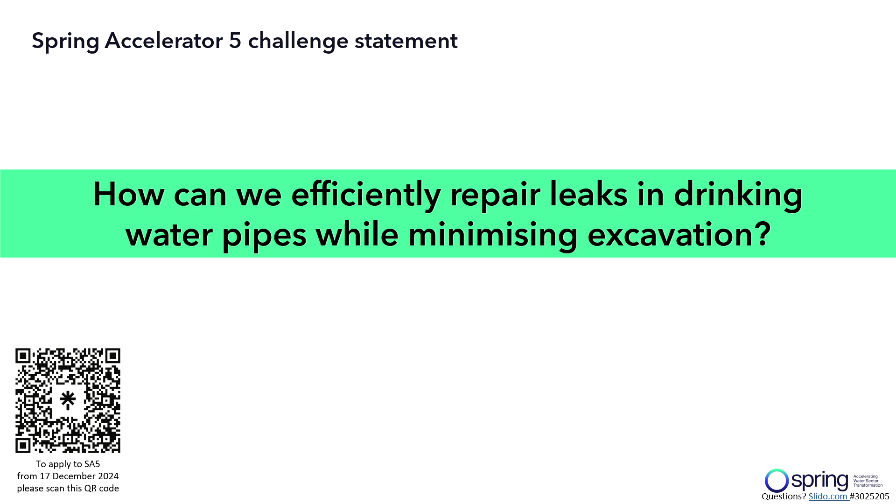So how has this challenge been selected? All the water companies in the UK and Ireland submitted their business plans, their innovation priorities. We went through all of these, we collated them, we assessed them to see what the top innovation priorities were. Water companies then voted. We did a lot of things. But I want to particularly thank Jez, who did a lot of hard work in this space.

He engaged with the Leakage manager group to be able to narrow down some of those different challenge areas, find what their problems were. With this short list of problems, we would then much more easily be able to go to the water companies and say, which of these do you think is the greatest challenge? Because sometimes when we start off this challenge process, just going to a water company and saying, what are your issues? It is quite a difficult thing for both us to ask and them to answer.

So we took all of those key challenges together, and we discussed it at length at the Spring Accelerator 5 Ambition Surgery, which is again that free open access webinar. I can see some people in the room who presented at that webinar as well, thank you very much. The purpose of the webinar was to understand the context behind the topic area of leakage and burst, to outline the playing field and to learn from the past.

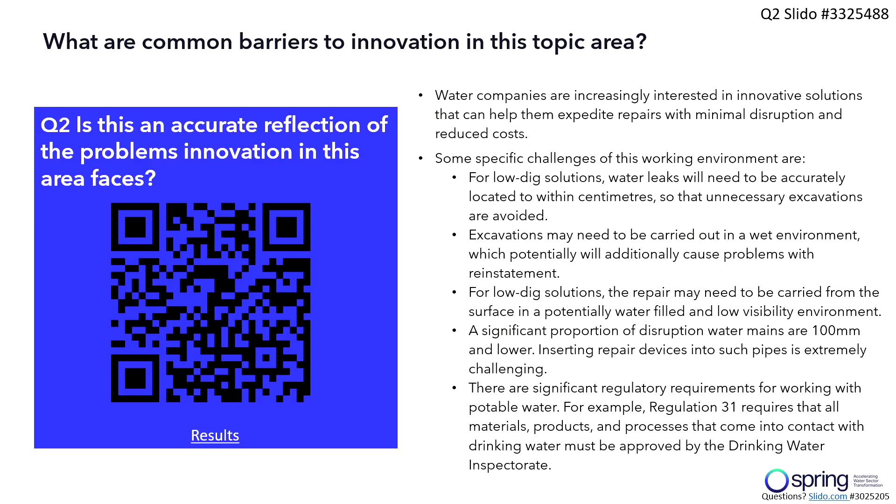But at the same time, they were trialled multiple times, and I think that's the barrier to innovation, is that every single water company has to trial it, and so no one wants to stump up for the constant number of trials that they need to do to be able to satisfy everyone. And again, don't get me wrong, wholesome water is the most important thing. However, everybody trialling it to the nth degree is the biggest barrier to innovation in the UK water industry by a country mile.

Thank you very much for that. So I think there's two points that I'd like to add to that. The first one is part of the Spring Accelerator process is that we're involving all of the water companies in the UK and Ireland. So that sharing knowledge piece is integrated into part of this process. So as opposed to standalone trials, all of the water companies are talking to each other about what trials they're anticipating, what they're hoping to do.

And sometimes we have water companies come together as part of this process who maybe have got facilities for a trial to happen, but they've not got the financial resource or the staffing. So the water companies work together to have collaborative trials. And that's part of the benefit of working through the Spring Accelerator process. We don't actually offer finances as part of our application, but the water companies provide that finance together.

I think the second part of that is it's really interesting to hear that there's a lot of solutions out there in this space in the US, and hopefully this call for innovation will attract those US suppliers to give this a go. I previously worked with a supplier who was based in the US, and the US market is very, very different from the UK market. I mean, I wouldn't have had a job in that role if it wasn't.

So my role was all about helping to facilitate that movement from the US to the UK, because it is difficult and it's really, really different. So thank you very much for your comments.

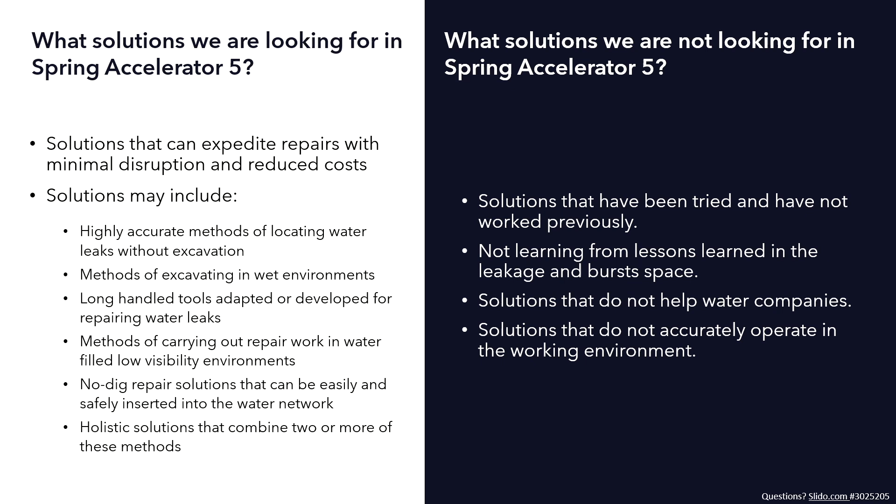Solutions that are not going to be helping water companies. Our stakeholders, in a way, are the water companies. The reason why we've put so much work in, that massive mound of bullet points, is also to make sure that the problem statement is correct and the call for innovation is correct to help water companies the most. We want innovations that are going to help water companies solve their challenges. And we don't want solutions that are not going to work, obviously, or that are inaccurate. So we want solutions that are going to help and take a step forwards to answering this challenge statement. What solutions are we looking for? We've kind of already covered that a little bit, so I'm going to move on to the next slide.

So again, I'm not looking for duplicate projects here, and that second question in particular can be really difficult to answer. That tool that Jamie's trying to build at the moment, it's just so difficult to work out what has been done in this space, what is currently being done, and what will be done in the future, just in one water company alone, let alone communicating all of those strands of data between the water companies. I'm not going to call out to the room for question number 4 because it is a never-ending list of things that have been tried in this space. But would solutions such as these have value to the water sector? That doesn't have to be a yes or no. There could be extra things that you want to add.

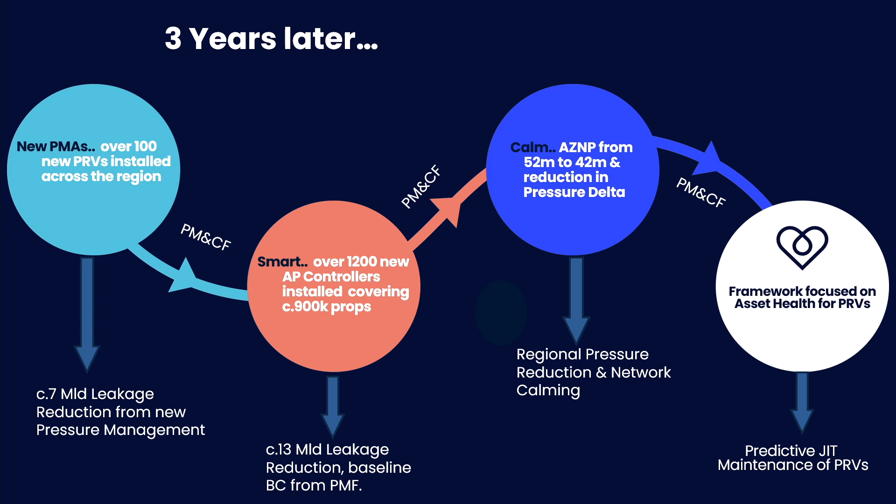I'm sure there's a lot of leakage people in the room that know that that'll probably increase the hour-to-day factor a little bit, which can negatively impact your leakage calculation. But what we've seen from taking a balanced approach and trying to maintain a flat line is the reduction in minimum night flow actually outweighs any small increase in that leakage calculation as a result.

And the last bit on there, this is probably the bit that I'm most proud of. So this is where we've utilised all that real-time data that we've suddenly got coming into Yorkshire Water and into those platforms to inform our maintenance plan in the future. So it's looking at real asset health of our valves and of the network. We're using that data from those 1,200 controllers to create a just-in-time predictive maintenance of our PRVs. This is just an example of that.

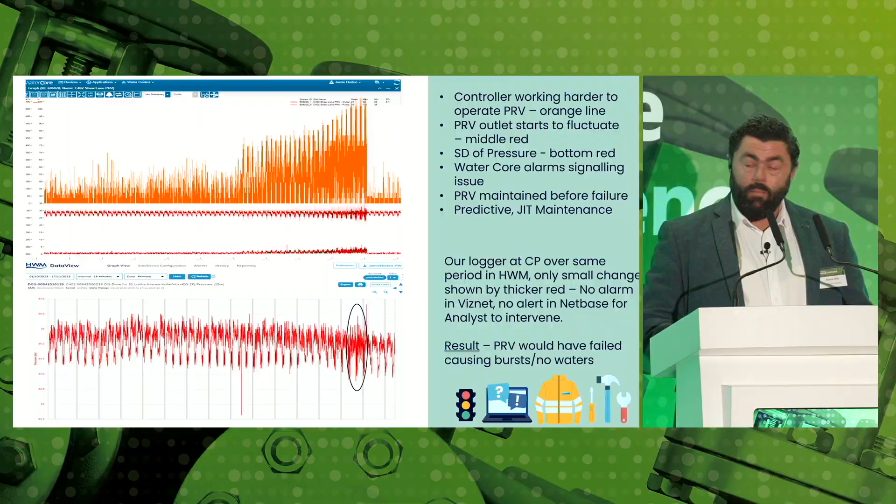So the orange graph that you can see there shows the controller working harder to maintain the downstream pressure on the PRV, which is the red line below it. And what we actually see at this point is the bottom graph is the critical point in that DMA. And you're not really seeing much change at all, even though that controller is working a lot harder just to maintain the operation of that PRV.

And what we've actually done here is you can see where the drop off on the orange line is. We've gone out and maintained that valve before failure. And I think what we probably would have experienced is a total failure of that valve, because we're not seeing such an impact at the CP.

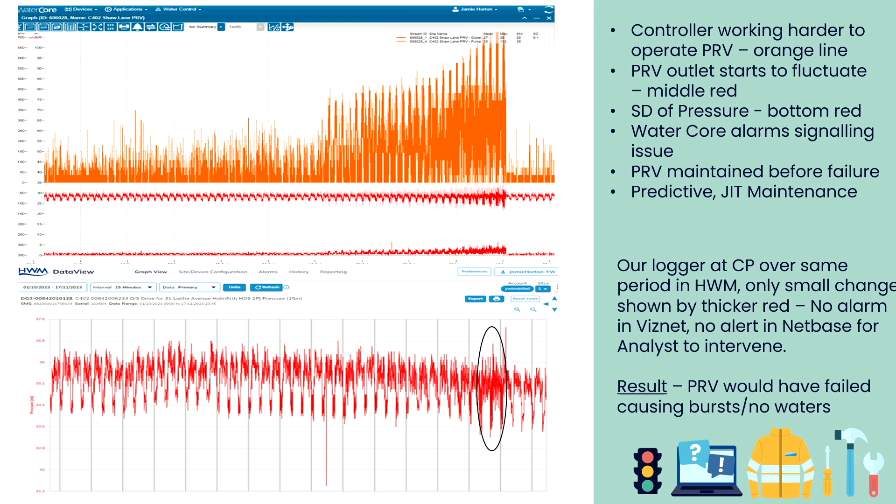This is just to understand the scale of that. So that's 1,200 controllers, we've got 72,000 acres across Yorkshire. And we normally target proactive maintenance of around 800 valves a year, and that's a mix of minor and major.

And coming up to November, December, we've actually predictively done about 238 valves. And that's just from performing maintenance when it's actually needed rather than just doing it proactively for the sake of it. And that's over a 50% reduction in maintenance activities, and that brings with it its own savings.

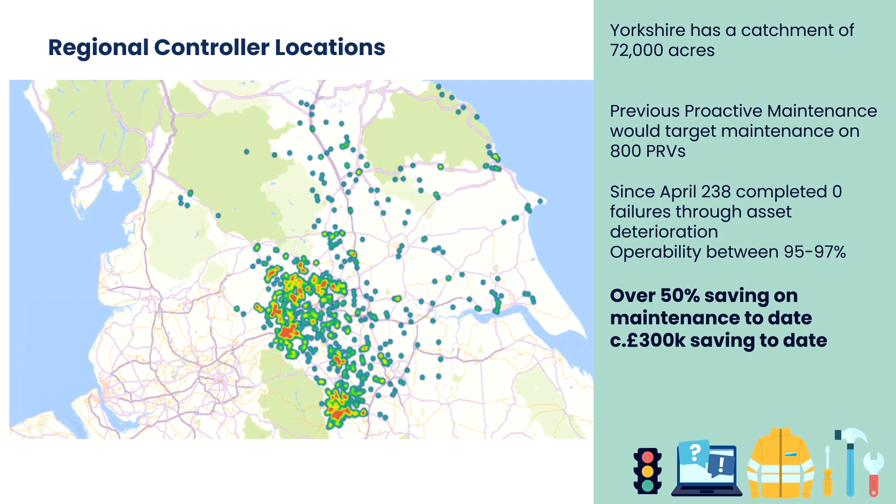So lastly, just to wrap up, key themes for the pressure management and control strategy that I managed to implement, and a lot of other people have that attend the forum. So a dedicated team is a must. You need to have those people that are constantly reviewing pressure management we've put in place, liaising with people across Yorkshire Water and customers, and also identifying new opportunities for pressure management.

You need to put a strategy in place and get the senior leaders to buy into that idea, and we are going to reduce pressure. It will have an impact to customers and people within the business, but it's the right thing to do because it's the most effective tool we've got, probably the most efficient tool for leakage reduction.

And last bit on there is, smarter networks are essential. I think nowadays there's a lot of controllers out there, there's a lot of new technology, but being able to use that to inform us to look after our assets better and maintain them in a more timely manner, I think is just so important for us. And that's it. That's everything.

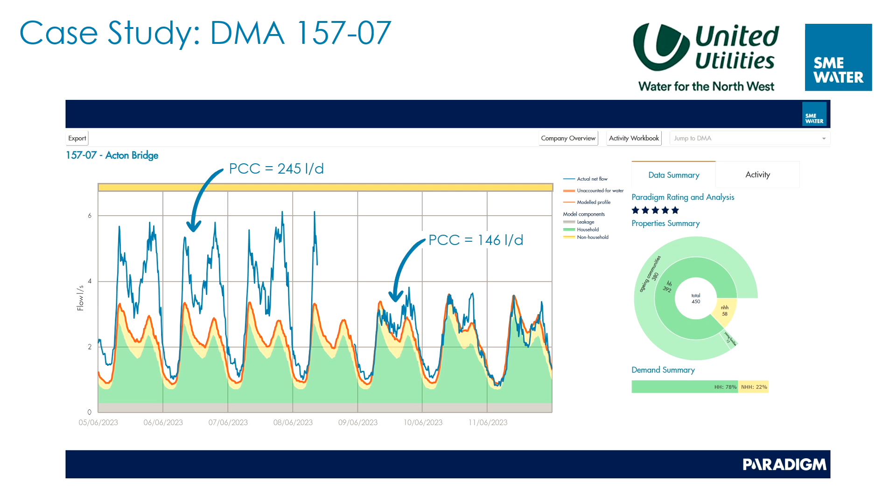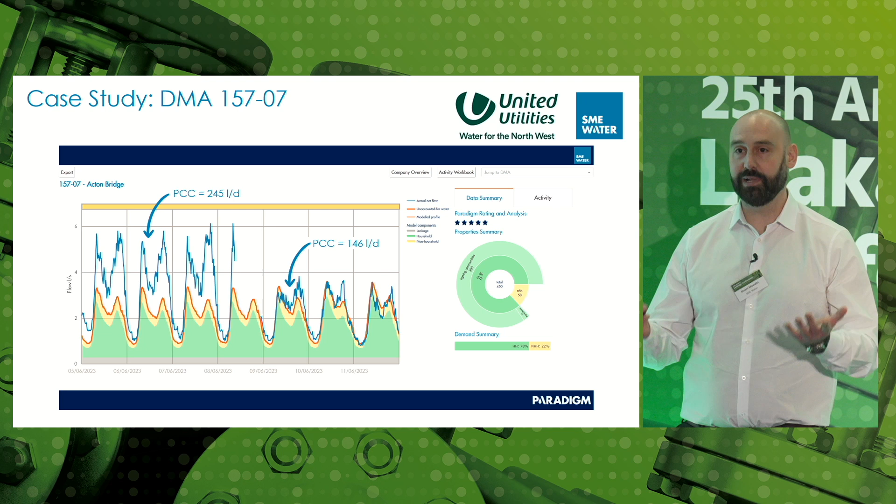So before it had a PCC of 245, which is legitimate. It's operable for most water companies. And afterwards, it's around 146. So it highlights that whilst as an industry for reporting purposes, we're driven to focus on making sure operability is up at 90–95%, that doesn't tell us that the DMAs are reliable and trustworthy, and we can send people in with confidence.

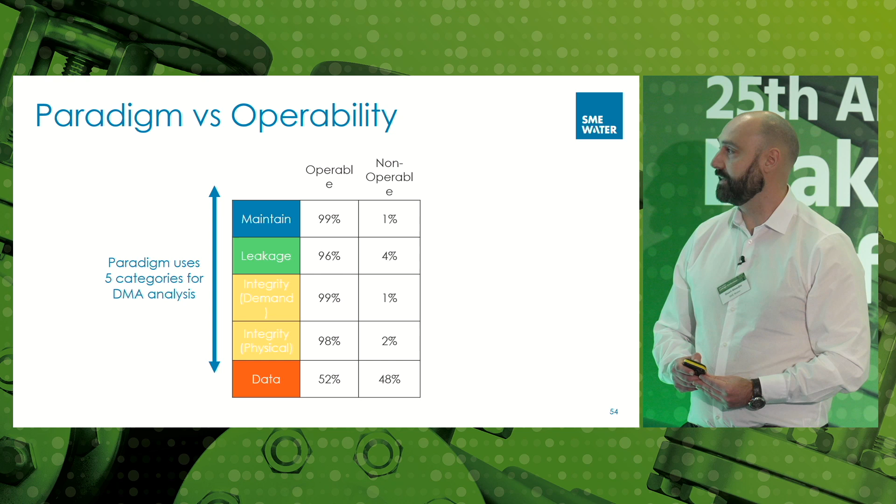So, in Paradigm, we have 5 different categories that we use to categorize: maintain, leakage, integrity, and demand. And these DMAs are typically operable in the top 4 of these categories. And when we look at the bottom section, in the data category, that's where we tend to see the non-operable DMAs fit. We're just going to run through and look at these different categories.

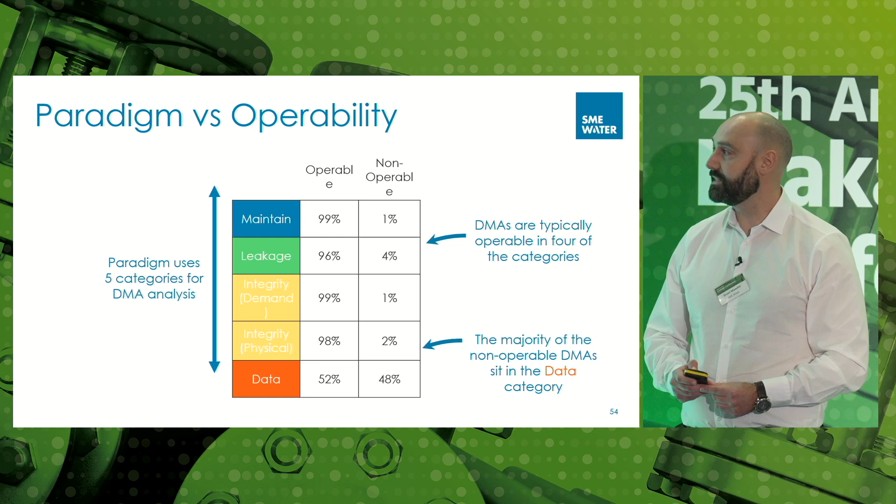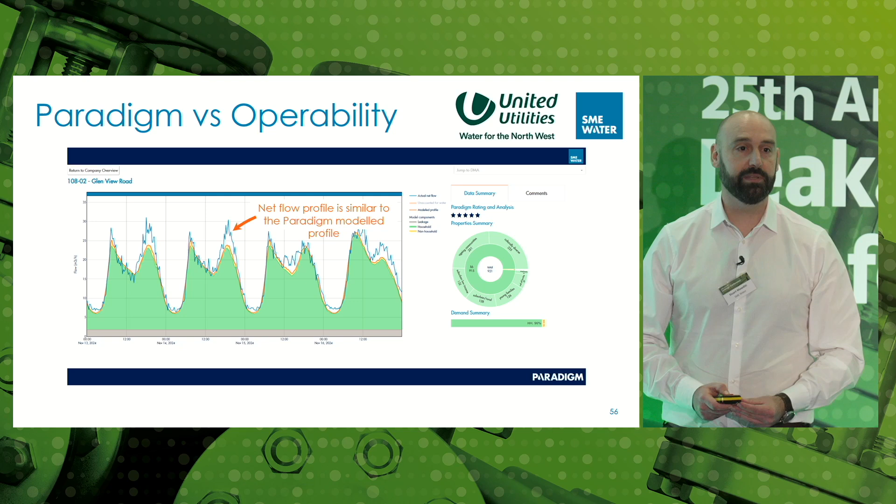So first of all is our maintain. That's where in Paradigm we say we've got a really good fit in terms of what's happening there. So we see I've got a blue net flow profile and it matches what's happening in the DMA. That's where we've got confidence in what's happening. So that gets a good tick. We'd normally be doing leakage in there using operability anyway, so we're doing the right thing.

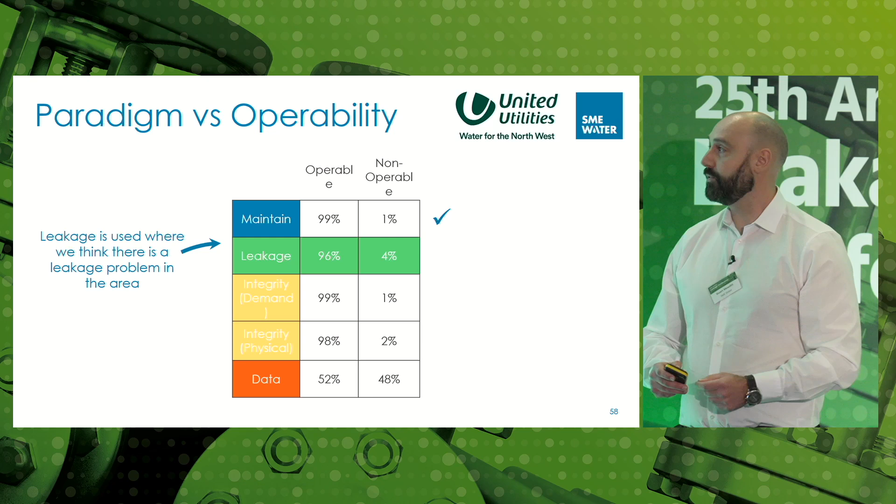Moving through, we use our leakage category to identify where we think there's a leakage problem. So there we can see in that area there's a significant and consistent offset that tells us the leakage in that area. So nice and easy for an analyst to look at and go, yeah, there's leakage. We need to do something.

We can also look at the unaccounted for water shape. So you can see there, whilst there's a bit of noise on that profile, that unaccounted for shape, which represents the difference between the actual net flow and the model profile, gives us full confidence that there's a good chunk of continuous usage in that area. Again, doing the right thing in those areas.

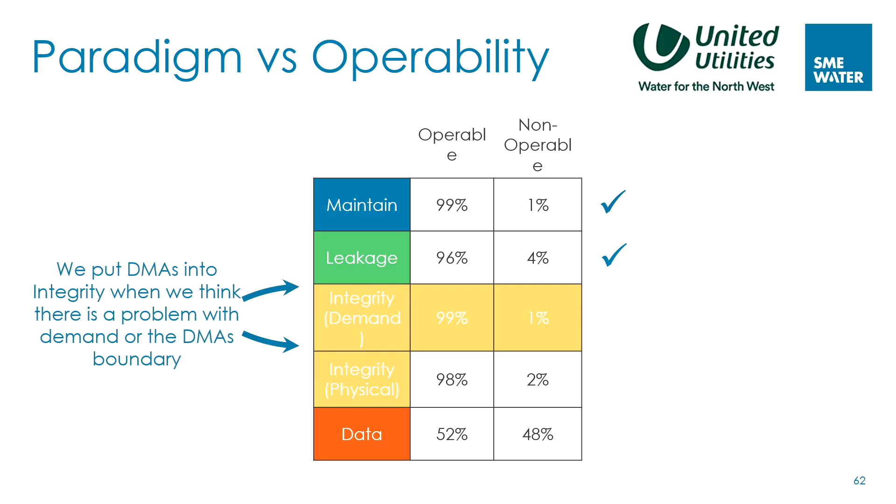Moving down, we then put things into integrity categories where we think there's a problem with either demand in the DMA, where it doesn't match our expectations, or maybe a problem with the integrity of the boundary, so something to do with the meter, or somebody's left a boundary valve open. Again, we can see a high proportion of operable DMAs in those categories.

And when we look at that as an unaccounted for water profile, we can see we have a low discrepancy at night, which is good because it means that there isn't leakage being reported and calculated in there, because that's when we calculate our leakage. But actually, we've got a volume of water in there which is being missed. So we're thinking that that DMA is performing well because it's got low leakage and it's operable, but actually there's something not right with that DMA and what it's doing.

So that's questionable. We're not doing leakage work in there incorrectly, but at the same time, we're missing customer demand in there. And actually, when we come to do our reconciliation top-down, bottom-up later on, we've missed an opportunity to understand that area better.

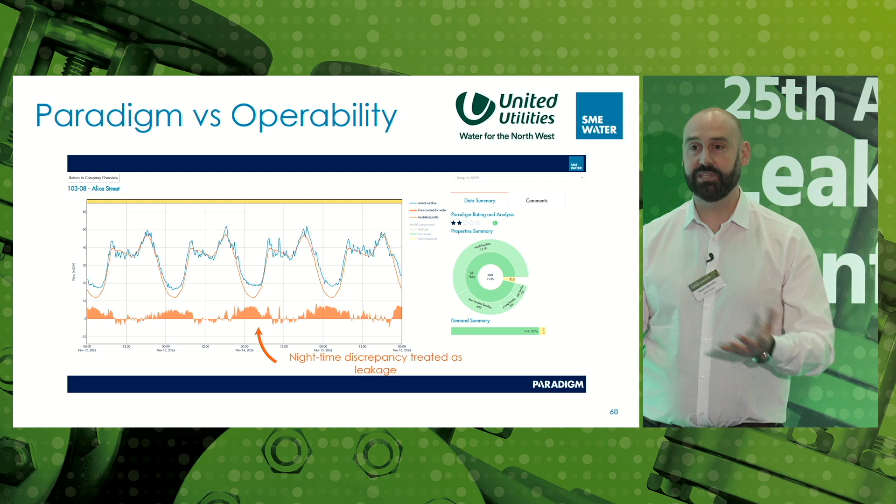Moving on, we then look at where we think there's a physical problem with the integrity of the DMA, a valve open or something wrong with the meter. So that might look like this. So the opposite of what we just looked at. So we've got a shape that fits well in the day, but it doesn't fit so well at night. The problem with this is that it sits in our nighttime, so actually that's then treated as leakage. So from our reported calculation, we're then saying that's leakage.

Now, when we do our reporting, we do have differences in night use and variations, and they tend to average across the company. So not a major problem for reporting, maybe. But from a targeting perspective, we've got 40 meters cubed per day of unaccounted for water in there, but we'd be saying to our targeting teams there's 80 metres cubed per day of leakage in there because we're so fixated on just that nighttime period to do our calculation.

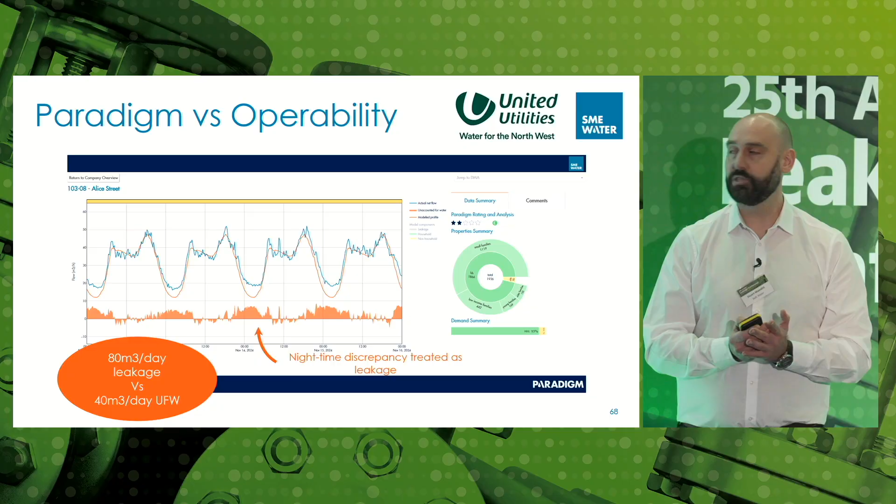So not a good area, because we're sending leakage teams in to do work when actually there probably isn't a leakage problem in there, or even if there is, it's masked by something else that's stopping us from doing what we need to do.

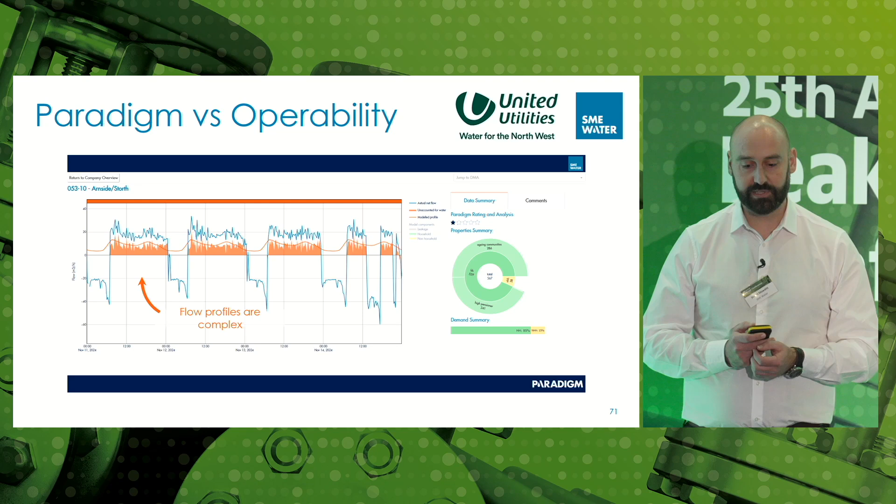In the data category, we're saying we've got little resemblance between the net flow and what's happening on the model profile. So it might be that the areas are really complicated, so that's not necessarily a wrong area. We've just got different flows, we might have storage in there, we've got a lot going on in terms of what's happening. So they can be quite complicated, hard to analyse.

It might also be that the data is quite erratic, so it's doing generally the right thing, we've almost got a diurnal profile in there, but it just doesn't quite make sense, and very lightly at the bottom you can see the model profile, which shows how much water that area should be using. So it's using a lot more water than it should be doing overall, but really we can't draw any conclusions as to what the cause might be. So that's not good, because we're sending targeting teams in there to do work, but actually we haven't got any level of confidence in how those DMAs are performing and what they should be doing.

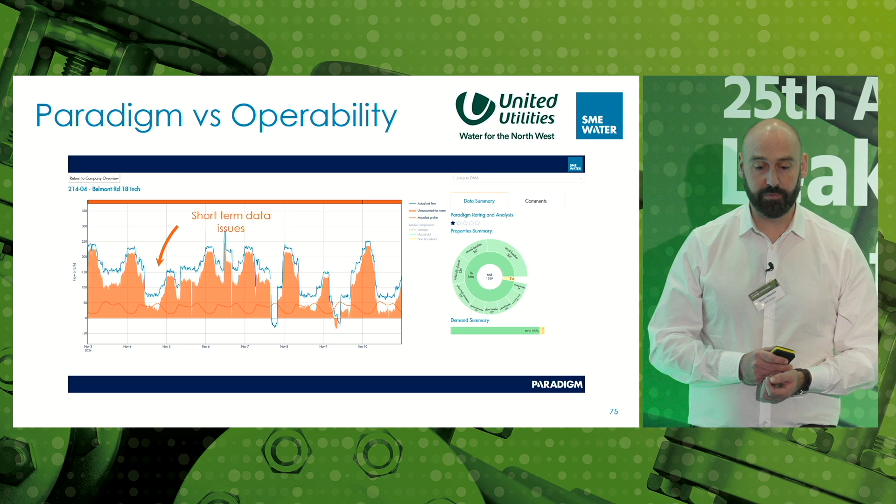Final bit on the right is where we've got non-operable DMAs, where we're saying there's a problem. So they might look like this. That's not the normal behavior for that DMA. We've got a meter that's causing us a problem and giving us a net flow profile that looks a bit chaotic. Or we might just have a flat line in an area, so we just haven't got data at all. So in those cases, we're doing the right thing. We're not sending teams in at the moment.

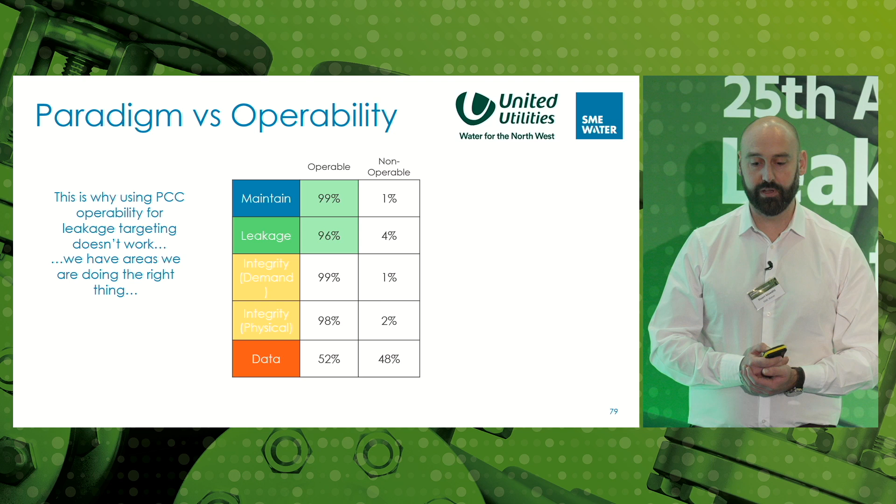So this leads us into why PCC operability for leakage targeting doesn't work. We end up with this big chunk of areas where we're doing the right thing, and a big chunk of areas where we're doing the wrong thing. And when we look at that as a percentage of our operable DMAs, we can see that only 55% of our DMAs sit in that category where actually we can target them with confidence. We can send leakage teams in there and say, we're absolutely sure that that DMA is doing what it should be doing. 40% of DMAs, we can't target with confidence.

We're not actually 100% sure that the area is tight, that the meters are working, that the customer demand's right, that actually all the data is doing what it says it should be doing. The key takeaway from this is that data leakage, that emerging data problem that we should be challenging and looking at on our network, completely blurs this picture and often results in us sending people into the wrong areas.

I'm going to hand over to Courtney to talk about our strategy.

Okay, so first of all, I have to do a little disclaimer. If you've seen me present before, I always have to say this. I do sometimes make a high-pitched squealing noise. It is a hiccup. I might just get one, but if I don't say it, it'll happen and you'll think what's going on. And now I've said it, they're probably not going to happen, even though I've been stood there trying to hold them in while Stuart was talking. Also, Stuart is the more serious one, although he's smiling at this. I'm the more fun one.

So if you could all stand up, please. Like actual stand up. It's no technology interaction here, it's just... Everyone's like, oh God, she's making me stand up. Okay. This is really purely for my amusement. Is everyone up? Okay, good. Right, sit down. Oh no, hang on, let's do it the other way around. Stay stood up if whenever you hear the word collaboration, in your head you go, stop, collaborate and listen. Well, you all do that. You're all the same as me. Oh my God, no one sat down, or you didn't understand the instructions and you all say, okay, great.

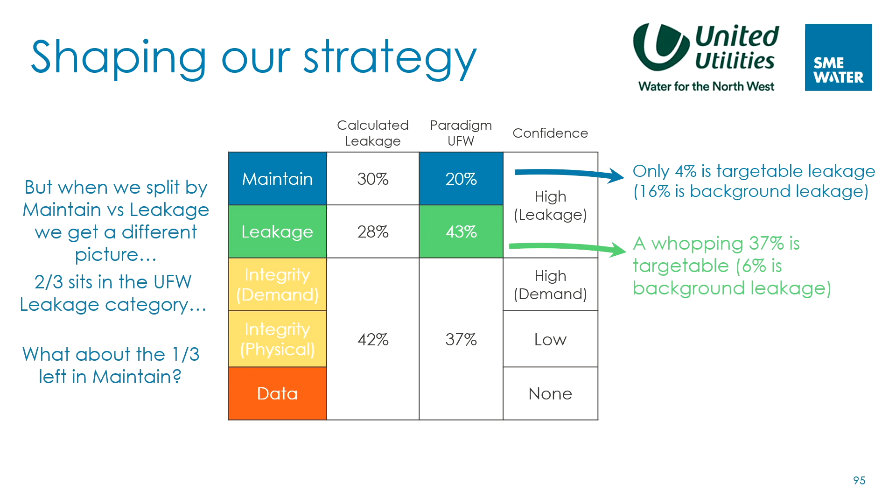37% of that 43, can't read my own slides, is targetable, and only 6% of that is background leakage. So brilliant. We are sending people where we think the leakage is, and we think it's leakage that they actually can find and we can do something about. It's the real stuff, not the data stuff we talked about earlier. Okay, moving to the bottom part where we've got that less confident kind of banding. 40% of unaccounted for water and calculated leakage sits in those lower confidence areas. So we're going to have a look at that in a little bit more detail.

So let's talk about integrity issues. So in some areas, Paradigm tells us that we are missing customer demand. I'm pleased to say it's only 6%, but hey, I'll take 6%. It's something to go at. We now at least understand that that is an issue for us, whereas in the past we wouldn't have had that understanding. So we've incorrectly been targeting those DMAs looking for leakage, when actually that wasn't the right decision and wasn't the best use of our resource.

So we actually need to do something different with those, and we need to deploy demand analysis and investigations instead of our leakage teams. Okay, so find and fix the missing demand. Ooh, another bit of the strategy that we need to do. Okay, in other areas, we're still in the integrity physical variety. We have metering and valve integrity issues. We might have configuration issues, all at play.

So now we're aware of those, because lots of these are in our operable DMAs, which in the past were fair game to go target, we can now do something about them. We need to recognise that we need to do more and to improve those DMAs and to maintain them. And there's a really big engagement piece to do that.

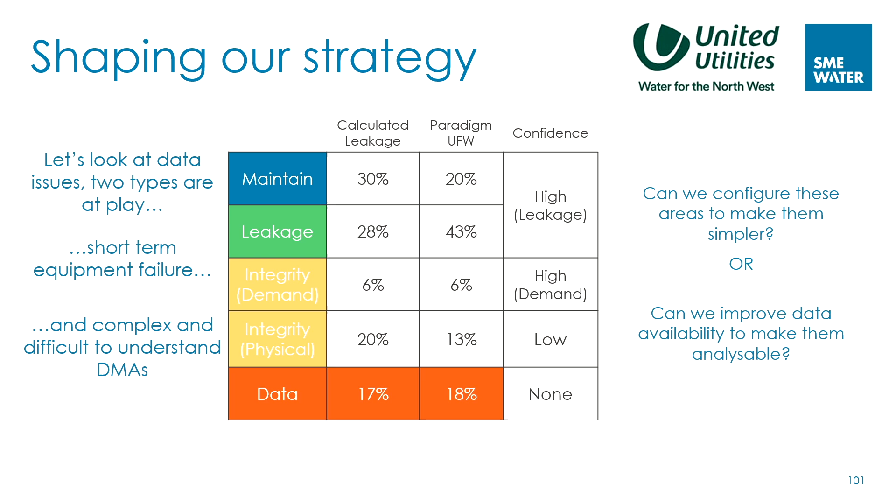Okay, and then finally we have our complex and difficult to understand DMAs. So then when you start on these DMAs, start thinking, can we configure these areas to make them simpler, that's maybe not good English, let's just go with simpler. And can we improve the data availability to actually make them analysable? Again, I'm not sure if that's English, but please don't hold that against me. We've probably not spent a lot of time looking at that, but now we know it's an issue for us. Actually, we need to dedicate some resource to it. Okay, so simplify.

So I've talked about lots of stuff there. Probably none of it rocket science, and you're thinking, yeah, we're doing quite a lot of this. Just want to summarise how this all pulls into a strategy. So the first part for us is about trying to prove our DMAs against Paradigm. We're aiming for a fleet of 5-star DMAs that we understand, we have confidence in, because then when they deviate, we can manage them with confidence. In our maintained DMAs, what we want to do, something different to maybe what we've done in the past, is just respond to breakout. See a change, we respond to it.

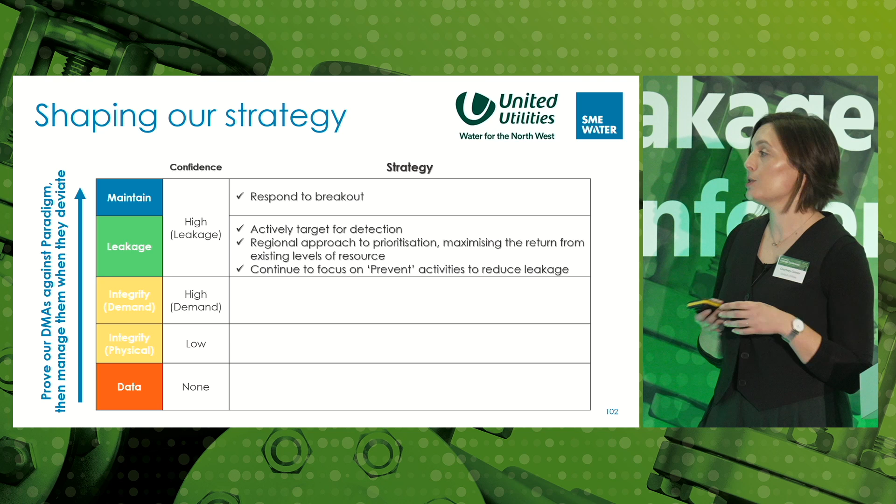In our leakage DMAs, we need to actively target those for detection. We need to push this regional approach to prioritisation and maximise the return we get from their existing resource levels. And then obviously still continue to focus on prevent activities to reduce leakage overall. In our demand integrity part, we need to respond to breakout still, because that's legitimate, but we need to focus analytical effort on demand investigations, and also heighten our focus on data management and quality assurance, because now we know these problems are there, we need to fix them, but we need to make sure they don't creep back in over time.

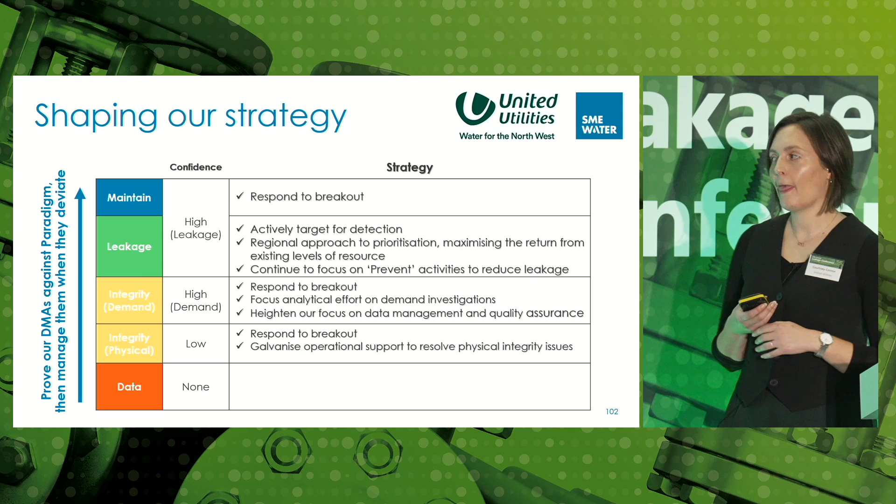In our physical integrity, we need to still respond to breakout, consistent theme here, but we need to galvanise operational support to resolve physical integrity issues. In the past, we're used to, it's non-op, therefore I need to do something. We now need to get to the mindset of, it's operable, but I can't trust it, we need to do something. So there's a lot of work to do there to galvanise support.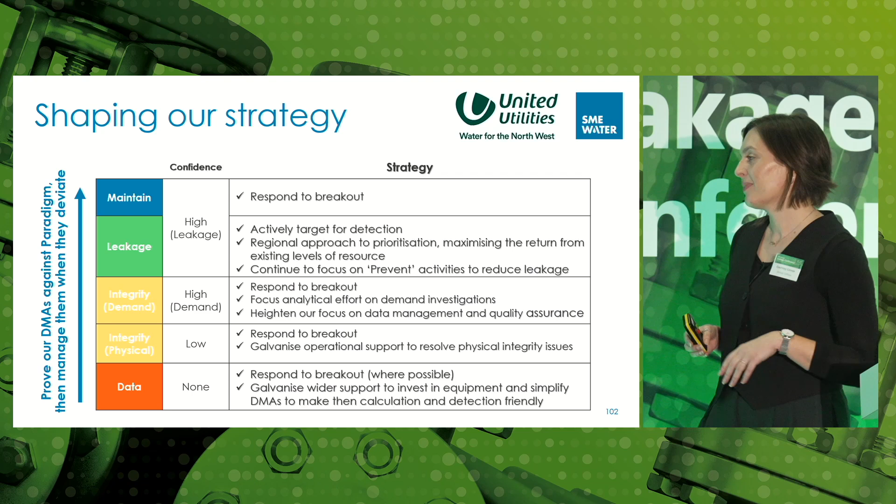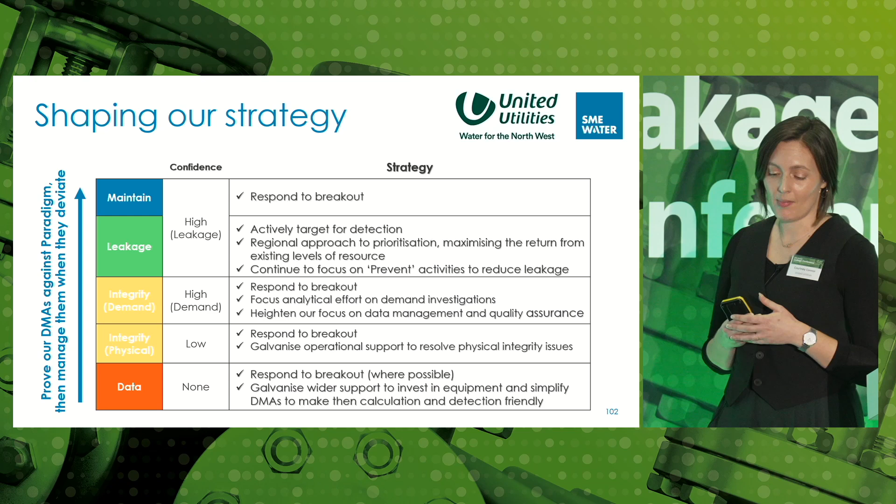And in our data, we obviously still need to respond to breakout if we have the data and it's possible to do so. And we're now trying to galvanise support from a wider cohort of people, the wider business. So we need to invest in the equipment, and we need to simplify DMAs, which again, unfortunately, is going to require money. Then we can make DMAs calculation and detection friendly.

So, in summary, operability is important for reporting, but isn't suitable for validating DMAs for leakage targeting. We saw earlier that Stuart showed how we went from 92% operable DMAs, which would have all been fair game in the past, actually down to focusing on 55% of our DMAs.

Targeting DMAs with high confidence allows our leakage teams to be more efficient and effective. It also helps with, they get results, they're more engaged, morale, lots of other benefits, but a big one is getting more from our existing resource levels. Promoting this idea of collective responsibility for DMAs and doing the right thing in the right place.

Brilliant, thank you very much, very interesting. Right, so we've got a couple of questions online and then we'll see if we've got any in the room. So the first one was, has the flow data used for operable DMAs been physically validated in any way? Yes. We're very good at fixing obvious problems. So yeah, our analysts would on a regular basis pick up very obvious problems. However, through this process, some less obvious problems have been highlighted. So we think we're validating, but are we validating to the level?